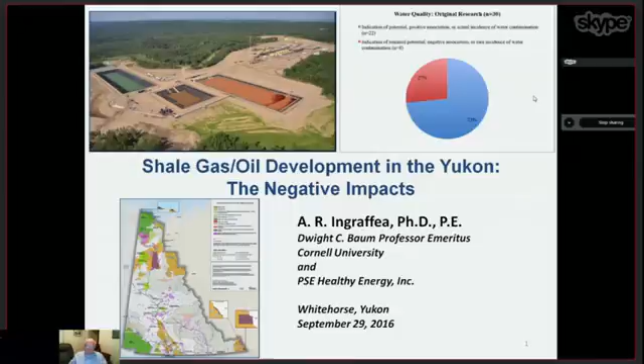So let me begin by telling you what we're going to do, and then we'll do it. So the first thing I'm going to do is answer some of the questions that you have sent to me. With the various communications I've had with the organizers of this session, I received a long list of questions, and it turns out that I had already intended to address some of them, so it's perfectly timely, and it's obvious to me that many of you have done your homework. So I'm going to begin by answering some of those questions up front, but I'll answer all of them during the talk that I'm going to give you.

Then I'm going to go into what is new for oil and gas in the Yukon. There has been oil and gas development in the Yukon in the past. Why is there a concern now? Why is there more concern now? And then I'm going to give significant details on what it takes to get gas and oil out of shale, because that is what's new. How to get gas and oil out of shale. Fracking is one part of it, but it's not everything.

Then I'm going to spend some time talking about what can and does go wrong during this process of getting oil and gas out of shale. I'll concentrate on two specific things in that area. And finally, I want to summarize what the science, the peer-reviewed, highly vetted, prestigious science says about the negative impacts on water, on air, and on human health due to the development of shale gas and oil.

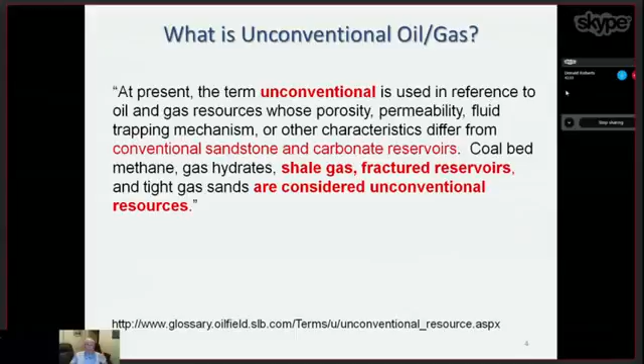So related to this issue of conventional versus unconventional, and this is very confusing, so I'm going to try to unconfuse you, is the issue of fracking. So the question I got was, is it true that hydraulic fracture stimulation, also called well injection, also called fracking, only happens in conventional wells? No. No. Fracking can and does occur in both conventional wells and in unconventional wells.

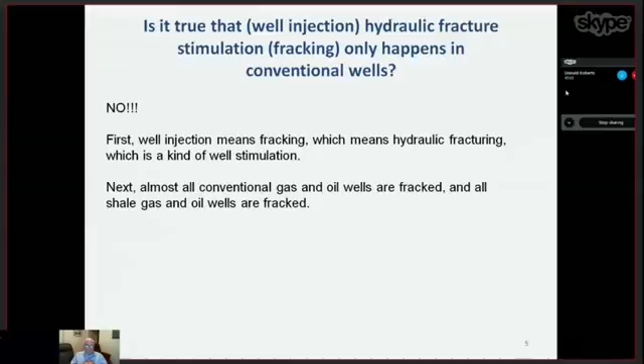The difference is, for you in the Yukon concerned about shale, that it is possible to get oil and gas out of a conventional well without fracking. Even though most conventional wells today are fracked, it is sometimes possible to get oil and gas out of a conventional well without fracking. But it is impossible to get any economically viable volume of oil or gas out of shale without fracking, which is another way of saying all shale gas and oil wells must be fracked. In fact, they must be super fracked. And I'll get to that difference between fracking and super fracking in a few minutes. So again, I hope I've answered that question.

Next question. Could I please explain what a perfing gun is and how it is used? Perfing. Well, first of all, perfing is an abbreviation for perforating, as in take a piece of paper and punch your finger through it, or punch a pencil through it. You're perforating the paper. Except in oil and gas, we're not perforating paper. So the purpose of perforating is to burn holes in what's called the well liner, also called casing. It's steel pipe, as you'll see in a few slides when I actually blow up a well and show you what's inside of it. And a very important part of the structure of an oil or gas well is layers, concentric layers of steel pipe called casing.

Well, you can't get gas or oil to come into steel casing unless you put holes in it. And you can't fracture the rock, you can't put fracking fluid out into the shale without having holes in the casing. So the purpose of a perforating gun is to, quote, shoot, although it really doesn't shoot a solid, it shoots a very, very high temperature liquid into the casing, burns through the casing, and burns a hole into the rock. The whole idea is to give access for fracking fluid to go out of the casing and for oil and gas to flow back in.

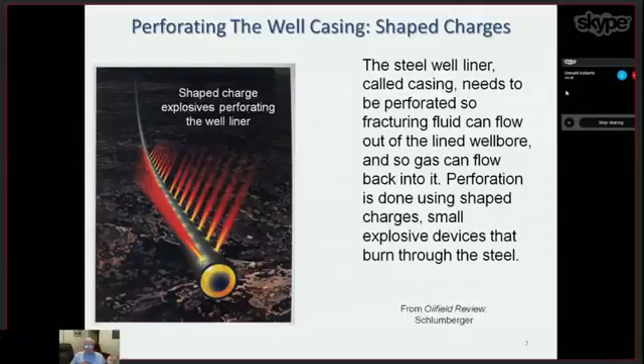So what are these perforating things? The word gun, one thinks about bullets, but there's no bullets here. You're not shooting a solid. They're shooting a very high velocity jet of liquid copper. So I'm not going to go through the details on this slide. You can go to the website, the Oilfield Review by Schlumberger. It will give you all kinds of details.

They're basically shaped charges. Those of you who have been in the military or have followed the military or read military books, shaped charges are used, for example, to penetrate armor in the military. Not with a solid, but with a high velocity, high temperature liquid metal, in this case copper. So that's what perfing is. That's a perfing gun. That's what is necessary during the fracturing process. Thousands of holes need to be burned through the casing in a typical shale gas well. So thousands of these shaped charges have to be created, transported, stored, dropped down into the well, placed exactly so that they get the holes in the right place, in the right orientation.

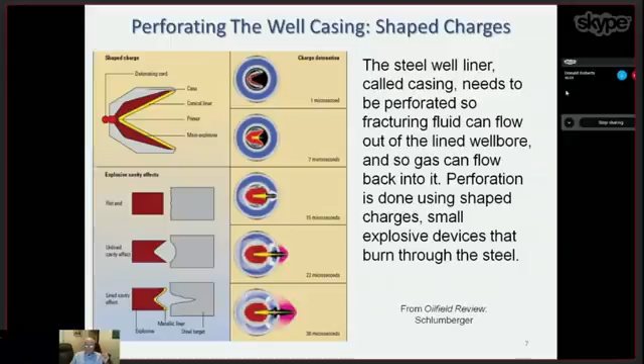We did laboratory testing down in Utah on large blocks of sandstone. So this is a conventional rock. This is a rock that would have absorbed gas or oil from shale. And we purposely did these experiments to try to understand the process of hydraulic fracturing.

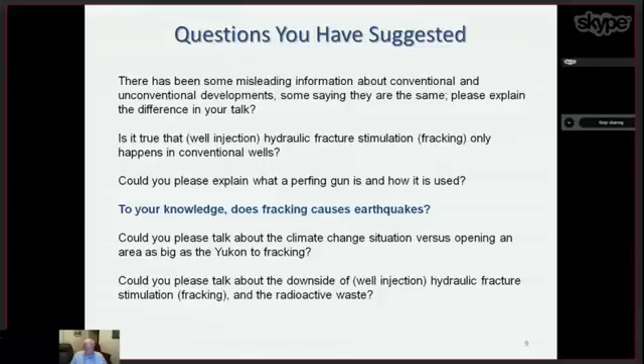Next question I'm going to answer right up front. To my knowledge, does fracking cause earthquakes? Yup, yes, definitely, for sure. In 2 ways: indirectly and directly. By indirectly, I mean that when a well is fracked, and a typical shale gas well in British Columbia is fracked with 40 or 50 million liters of fracking fluid. Much of that fluid comes back up the well after the fracking process, and that's called flowback.

So that's a waste. It's no longer drinking water. It's now wastewater. It's contaminated. So it has to be captured, it has to be stored, it has to be transported, and it has to be put someplace safe forever. In the United States, in most cases, it's re-injected back underground in a waste disposal well. A waste disposal well is typically an old oil or gas well that is no longer producing oil or gas. So it's now capable of receiving large volumes of waste fluid.

The problem is that this process has been overdone. Overdone in places like Oklahoma, Texas, Arkansas, Ohio, and England, among others. And in the process of injecting deep underground large volumes of this waste fluid at high pressure, faults, naturally occurring faults in the earth, have been mobilized.

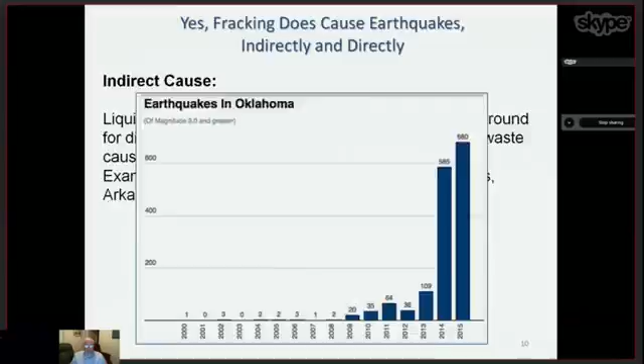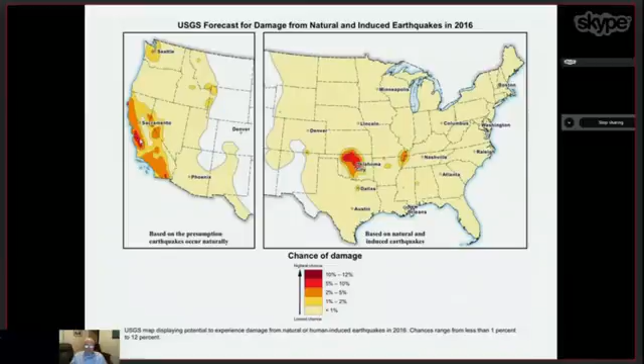So much so that now the United States Geological Survey, which issues maps of earthquake intensity and earthquake risk, now shows that the area in Oklahoma and Kansas and Arkansas and Texas, where there has been a large amount of shale gas and oil fracking and waste disposal, has very high risk of earthquakes. We've now made Oklahoma as risky as San Francisco. Thank you, oil and gas. I'm sure the people of Oklahoma really appreciate what you've done for them.

Second way that earthquakes can happen is directly by fracking. Fracking itself is, by definition, fracturing. Fracturing, by definition, is an earthquake. So, there have been many instances of fracking directly causing earthquakes, most notably not too far south of you in the Horn River area of British Columbia.

So in December of last year, there was a 4.6 magnitude earthquake. At that point, the largest man-made earthquake ever recorded. I said the largest man-made earthquake ever recorded from oil and gas operations. Not quite a year ago. And I then found out that that wasn't the world's largest because in January of this year in Alberta, a 4.8 occurred.

So 4.6s and 4.8s are not going to shake buildings to the ground, but they are going to crack walls. They're going to induce settlement. They're going to knock things off of shelves, and they could injure people. The question now that the earthquake scientists are considering, and this is a very important problem, and they're very worried, what's the upper end? How large an earthquake can be caused either indirectly or directly?

What we've seen over the last 7 or 8 years is that the magnitudes keep increasing. 7 or 8 years ago, the oil and gas industry was absolutely certain that they had never caused an earthquake. Never. In Texas, they still say that they don't cause earthquakes, but that's Texas. They're a different country.

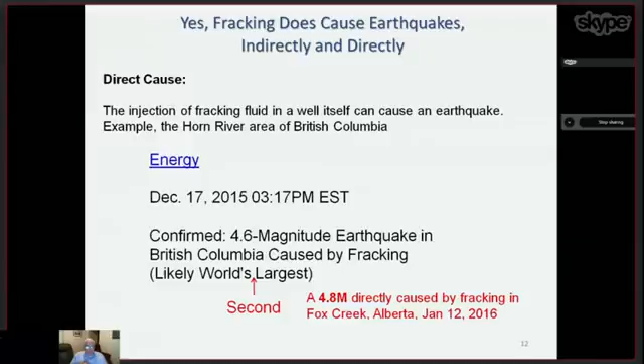But all of the scientists, all the prestigious, real, honest-to-goodness scientists in the earthquake area are absolutely convinced that oil and gas operations now cause earthquakes with increasing frequency and with increasing maximum magnitude. And we are at risk in the U.S., and you are at risk in British Columbia, of having a significant earthquake, a 5.5, a 5.6. Okay, a 5.6 is 10 times stronger than a 4.6. Buildings will collapse.

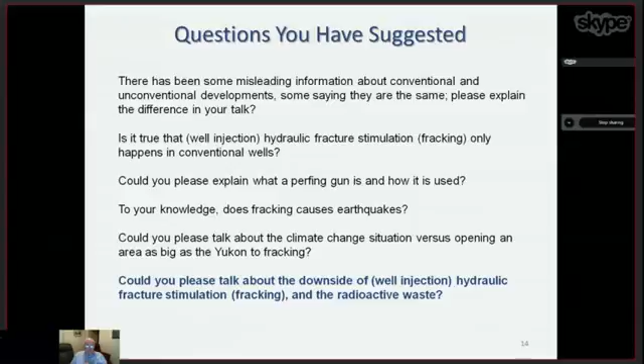There are 2 other questions I'm going to address, but I'm not going to do them right now. They will be addressed later as my talk develops. I'm going to talk about climate change, and I'm going to talk about the downsides of hydraulic fracture stimulation and the downsides of waste from hydraulic fracturing. So I will answer those last 2 questions, and you'll hear the answers later on in my talk. So let's proceed now back to my outline.

The first thing I wanted to do is answer the questions you sent me so we get all the definitions and all the incorrect notions and misinformation out of your minds. Now you have it from, quote, the horse's mouth. Everything I just said is correct and true.

And by the way, I hope that there are oil and gas representatives listening to this presentation somewhere. And if you hear me say something that you think is incorrect, please contact me directly and we will discuss it. I don't want you doing what they do in the U.S., which is you go on your stupid blogs and you criticize my talk without my opportunity to engage with you. Be professional. If you think I'm saying something incorrect, tell me to my face.

So, what is new for oil and gas in Yukon? I already told you. What's new is shale. Now, how do you get oil and gas out of shale? I'm going to use a bunch of pictures and videos and graphs and charts taken directly from the oil and gas industry. You'll see that this chart that I'm showing you right now was created by Chesapeake and Statoil, two major companies, trying to explain to their shareholders the process of getting oil and gas out of shale. So I'm going to spend a minute or two explaining it to you because this is really important. This is unconventional development of oil and gas from shale in one picture.

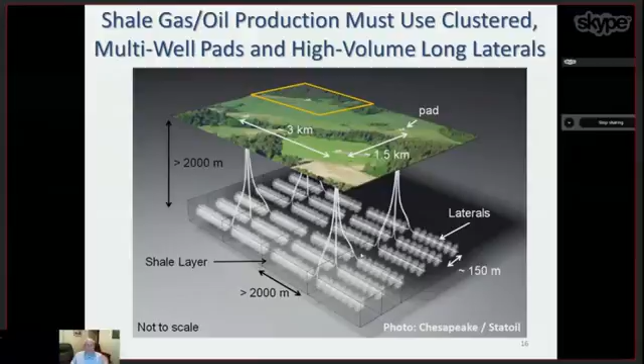So, having done all that, the problem is that this whole process is very inefficient. Industry isn't going to tell you that. You should ask, what percentage of the gas owned by the province, what percentage of the gas in the shale formation are you actually going to produce? Or what percentage of the oil are you going to produce? And they should be honest and tell you, well, we're probably at best going to get 10% of the gas and maybe 3 or 4% of the oil.

So all that effort, tens of millions of dollars on each well, all that fracking, all that heavy equipment, all the infrastructure that we're going to see, all the pipelines, all the compressor stations, all the processing units, all the truck traffic, all the new roads, all the new pipelines, and they're only getting a very small fraction of what's there. Why? Because shale is stingy.

Shale is mean-spirited. Shale is getting even with humans. I'm lecturing here from my pulpit. Shale is getting even with humans because it's angry that it was the last kind of rock that the oil and gas industry went to. It's been lonely for 150 years. It's been waiting for the oil and gas industry to come and take it. And because it waited, it's like the poor guy who was hoping that the most beautiful girl at the dance was going to come and ask him to dance, but she never came over, and now he's really upset.

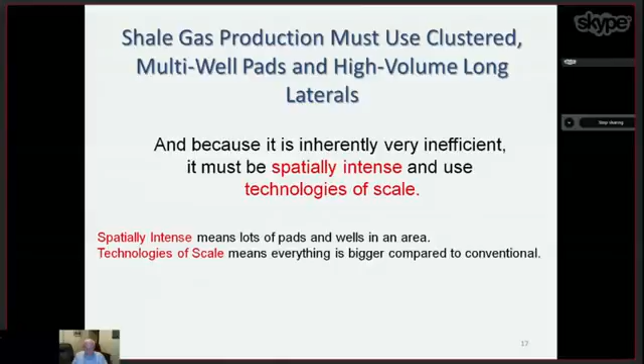So what do I mean by spatially intense? If you were flying over Texas in the area around Dallas and Fort Worth, Dallas and Fort Worth are a few kilometers off to your right in this map. Here's your scale. This is 4 kilometers. Every one of these white dots is a pad. I repeat, every one of these white dots is a pad. And every one of these pads has many wells.

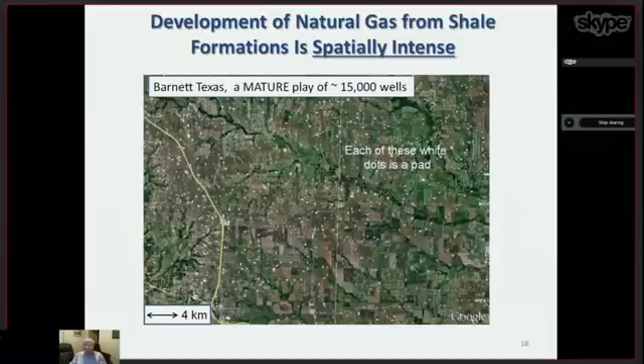So now I'm going to ask you to use your imagination. If there's going to be shale gas or oil development in the Yukon, is it going to look like this? Must it look like this? Is there some other way to do it? It will look like this. There is no other way to do it.

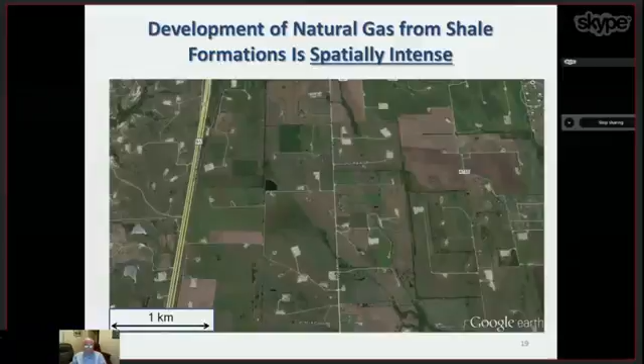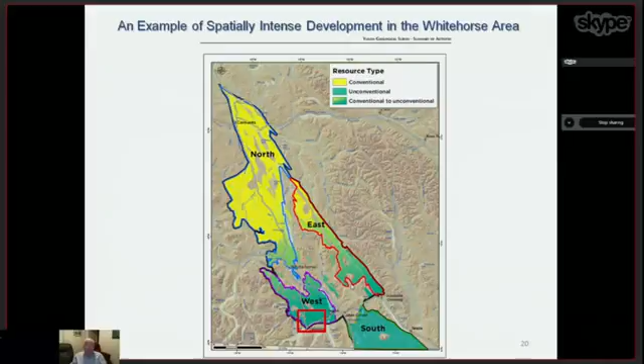So let's transport ourselves into the future. Hopefully a not true future. But let's go to the Yukon. And let's go to some area south of where you're sitting. Here's Whitehorse. We're going to get down here near Carcross. And this is an area that's been designated as an unconventional resource. Here are shales. So let's go into this red box. So this is the area inside that red box. Here's Carcross, Route 2.

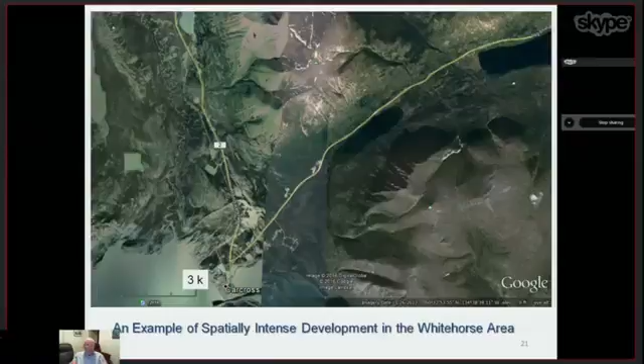Now remember that yellow square I showed you around the pad on that image I showed 3 or 4 minutes ago? Let's start putting pads in this area at the same spacing that the industry would like to use for clustered multi-well pad development. Bingo. Every one of these yellow rectangles is a spacing unit or development unit for a pad. Each one of these red dots is a pad.

And the idea is you don't leave any stone unturned, pardon the pun. You want to drill everywhere. If there's gas or oil everywhere in the shale here, you want to drill everywhere. And so from each of these pads, there would be 4, 6, 8, 10, 12 wells. Depends upon the geology and how much money they have.

Now, as you heard a few minutes ago, the previous speaker mentioned that these wells deplete very quickly. A shale gas or oil well runs out of gas, pardon the pun, in 4 or 5 years. After 4 or 5 years, it's a stripper oil well or a defunct gas well. Turn it off. It's not worth maintaining.

So a company will come in and drill the first 2 or 3 wells from this pad, and then go off and drill 2 or 3 wells from this pad, and then 2 or 3 from here, 2 or 3 from here, and then come back 2 or 3 years later and do 2 more here, 2 more here, 2 more here. In other words, they're going to be around a long time drilling. Years.

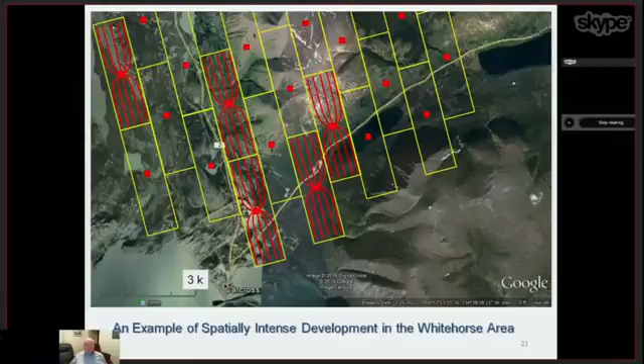Technologies of scale. So I told you everything is bigger compared to conventional. You need the largest drill rigs in existence. They're called triples, with very large horsepower diesel engines driving the drilling motor. You need much larger fracking equipment. You're fracking at pressures that are 3 or 4 times higher than conventional wells.

You're using 100 times more fracking fluid than a conventional well. And you're using 10 times the horsepower for the pumps. Typically 15 to 20,000 horsepower necessary in a frac job. Because you're using so much fracking fluid, you get a much higher volume of waste fluid called flowback. You're going to have larger and longer flaring and venting. And by the way, I have read your regulations for Yukon, and frankly, they are wanting. They do allow flaring and venting.

Venting is direct emission of methane into the atmosphere during flowback. I'll show you a picture of flaring in a few minutes. A lot more truck traffic, because you have to transport large volumes of water, large volumes of fracking fluids, large volumes of sand and a hell of a lot of equipment to each pad multiple times. Not just once, multiple times, because they're not going to do all 8 wells in a pad at the same time.

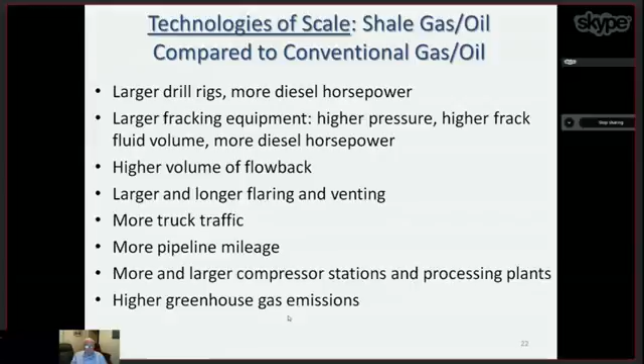And of course, much higher greenhouse gas emissions. And we'll spend time talking about that. So, what does a pad look like? I showed you an artist's rendition. This is the real thing. This is a photograph of one of the largest pads ever. It's in British Columbia, not far from where you're sitting. And in my opinion, British Columbia has always been the experimental playground for shale gas development, because there aren't too many people around.

And you'll notice there's been a tremendous amount of tree removal, a large amount of earth moving. Here's your freshwater pit to store water for the fracking process going down, and here's your wastewater pits to take the flowback coming back up. So all this waste has to go someplace. And you better be asking the people who want to drill in the Yukon, what are they going to do with it? Do you have injection wells in the Yukon? Has anybody checked to see if they're on fault systems? And if you don't have injection wells, where are you going to put all this stuff?

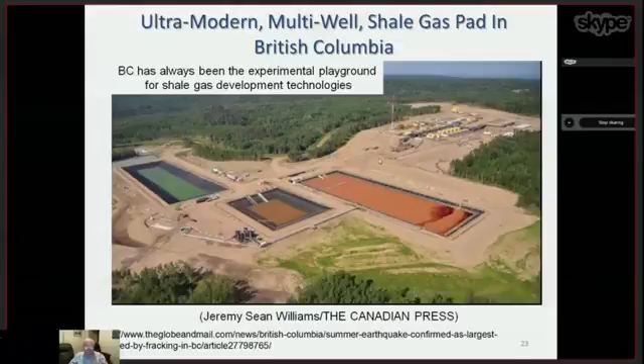So this is probably a 15 or 20 well pad. And when I say that British Columbia has been a testing ground, this is British Columbia, this is Pennsylvania. Look familiar? Large amount of tree removal. And by the way, trees are called carbon capture and sequestration units. Talking about climate change here. This is called burning your candle at both ends. You're killing a large amount of trees, and the trees are there to absorb carbon dioxide, and you're producing a large amount of gas, which produces a large amount of carbon dioxide. Bad news at both ends.

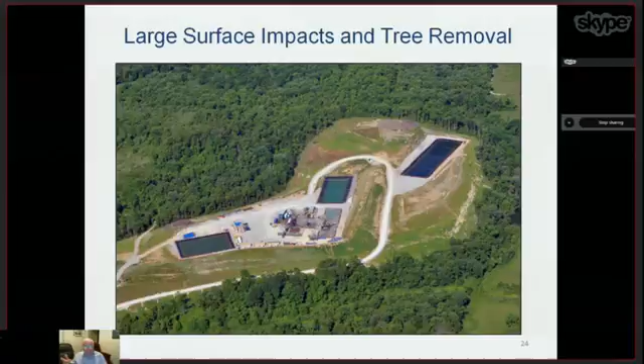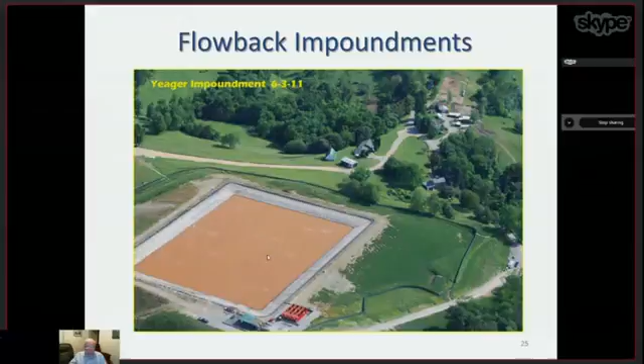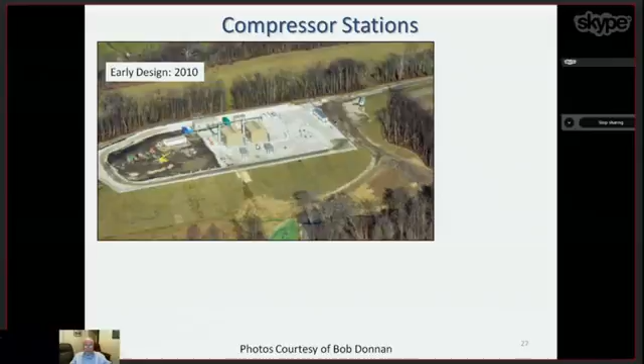Compressor stations. When the gas comes out of the well, it might not be at a high enough pressure to enter a transmission pipeline. So the gas has to be increased in pressure with a compressor station. Inside these buildings are 2,000 horsepower pumps that are pumping up the pressure in the gas. As more and more wells are built, and as more and more pads are built, compressor stations become larger. So here's a more modern version of a compressor station. 1, 2, 3, 4, 5, 6, 12 buildings, each of which contains two 2,000 horsepower pumps.

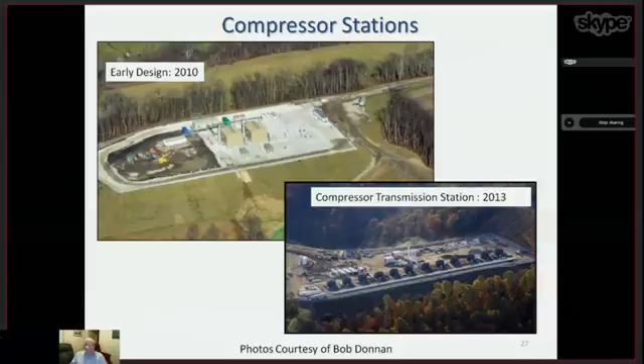They make a lot of noise. They emit a lot of greenhouse gases. And sometimes they have accidents called blowdowns. So I'm going to show you a video. And Jason, if you can cue up the first video at this point. This video is what's called a blowdown event. There's an overpressurization in the compressor station, and an emergency valve kicks off, and a very large volume of methane, natural gas, is emitted into the atmosphere directly.

Let me know when the video has started. We're going to start it right now if it works. Okay.

Is it going? Good. It's been going on for half an hour now.

So this blowdown event in this particular case was in Pennsylvania, not far from where I live now, and it lasted for over an hour. And I hope you can hear that very loud noise it's making. It goes around the countryside. You can hear it from miles away. And literally thousands of cubic meters of methane are vented directly into the atmosphere. This is not uncommon. You have compressor stations built in your area, you should expect to see this happening.

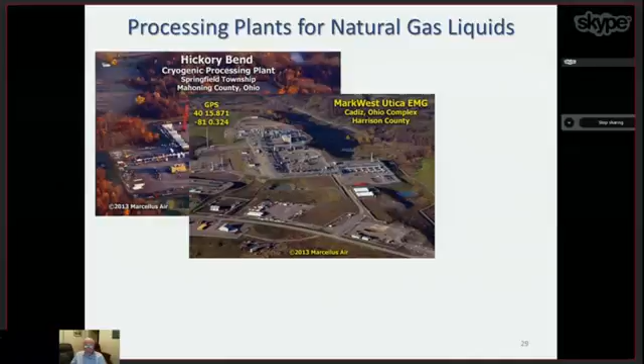So, bottom line, shale gas and oil requires a large number of multi-well clustered pads and what I call significant ancillary infrastructure. By ancillary infrastructure, I mean pipelines, compressor stations, processing units, dehumidification units, storage units. In other words, you take an area like south of Whitehorse and you take bucolic countryside, which is what it looks like from Google Earth, and you turn it into an industrial complex. If that's what you want, vote for it.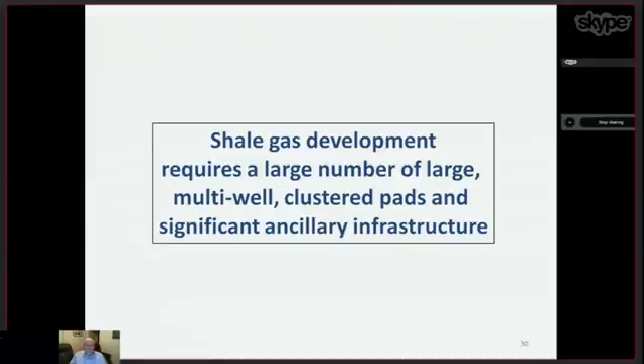Next topic, what can and does go wrong? I'm going to pick two things. Many other things I could talk about might come up during Q&A, but I'm going to pick two things. Drinking water contamination and methane emissions into the atmosphere. So we'll start with drinking water contamination.

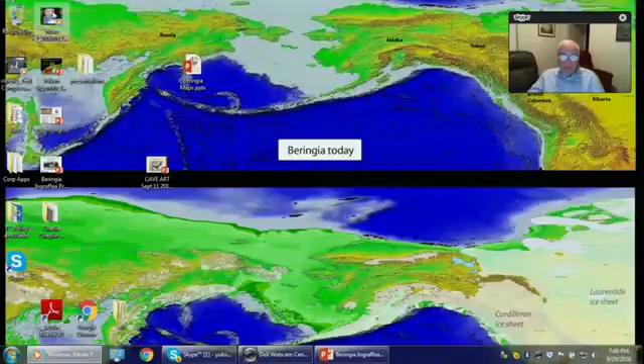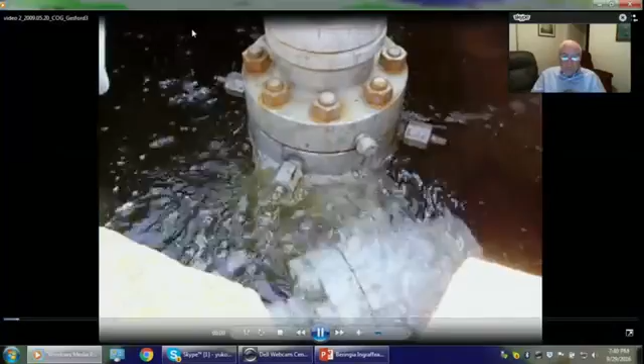Go ahead and do that video. And let me know when it started. Thank you.

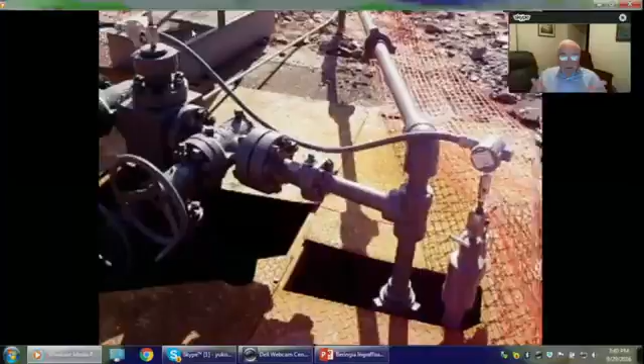So you'll see that there's been water collecting around the wellhead. That's probably snow melt or rainwater. And that bubbling you see is methane gas that's leaking outside the well, coming up into that water, and it looks like it's boiling the water, but it's just gas, like fizz in your fizzy soda drink. And that's methane going into the atmosphere. But it's also going through the groundwater table. So if the gas is leaking outside the well and it's getting to the surface, that means it had to go through the groundwater, which means the methane is now contaminating a drinking water supply. This is bad. And it happens too frequently.

You can stop that video now, Jason. Thank you again.

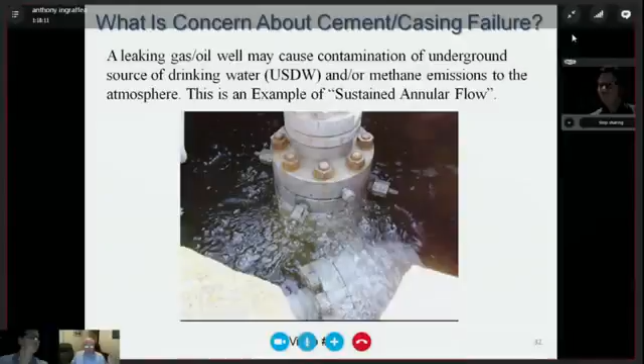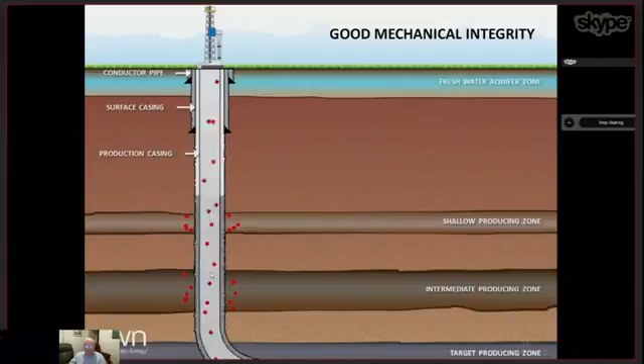And so if your well is correctly constructed, you have cement acting as a gasket so that the gas in this layer of shale can't get into the well. The cement is doing a good job. The gas is only coming out of the producing formation going to the surface. Bad things can happen.

One of the bad things that happens all too frequently is the cement job is bad. And the cement job can be bad for many reasons, and the industry knows it. There are literally 5,000 publications that I'm aware of in the industry compendium talking about bad wells, leaking wells.

So if the cement is not doing its job as a gasket, then gas from these intermediate formations can get outside of the casing that's supposed to be transporting the gas. And if the gas is not allowed to vent into the atmosphere, and it should, by your regulations, the gas is supposed to vent into the atmosphere, but if that vent is somehow blocked off or frozen, pressure builds up, the gas migrates into an underground source of drinking water, and your well water goes bad.

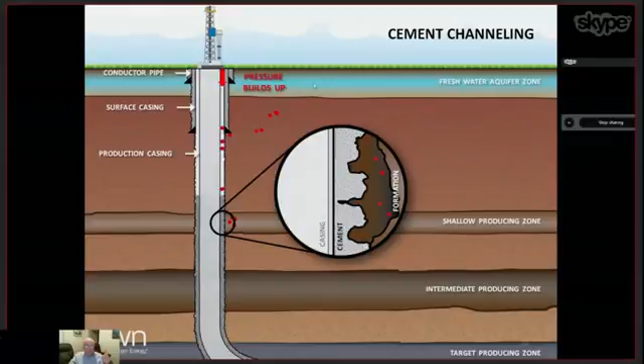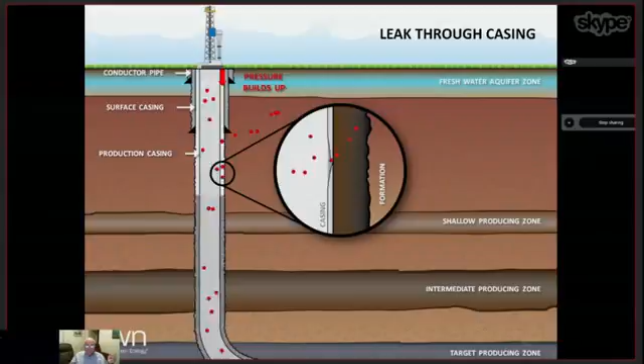You can have a casing failure, corrosion, cracking. Again, casing fails, gas leaks out of the casing, same thing can happen. The gas can get into an underground source of drinking water. Or maybe the cement didn't go where it was supposed to go. It's not like you can go down the well and look.

There are techniques, technologies that can be used to investigate whether a well is well constructed or not. Some regulations require them, other regulations do not. You might not know until the well goes bad that it had a bad cement job. And then it's very expensive and sometimes impossible to fix the well.

How often does this happen? We published a paper a few years ago looking at the frequency of occurrence of leaking wells in Pennsylvania. And what we found is that unconventional wells were failing at a rate of about 6.2%. 1 out of every 16 modern shale gas wells, modern, in a state which has very tough regulations, much tougher than the regulations in the Yukon,

1 out of 16 wells was failing within the first 3 years. And in some places in Pennsylvania, 1 out of 10 was failing in the first 3 years. That's a lot of leaking methane. And we'll talk about what that's done next.

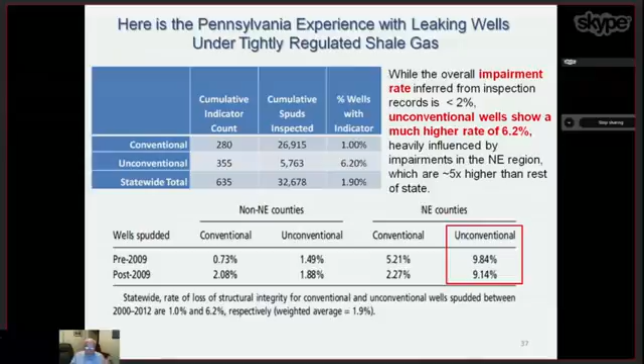And that made shale gas the worst possible fossil fuel from a climate change perspective. And in 2011, we were pilloried. Even the White House criticized us. Said it can't be true, impossible.

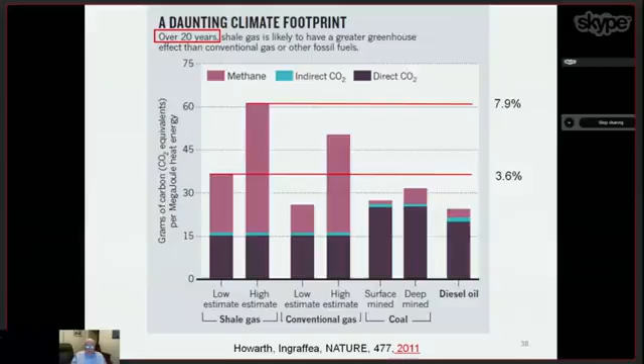Fast forward. 3 years later, our White House publishes 2 major reports. Climate change impacts in the U.S., a whole chapter on methane emissions. And then an entire new plan, a climate action plan, strategy to reduce methane emissions. Oops, we were right.

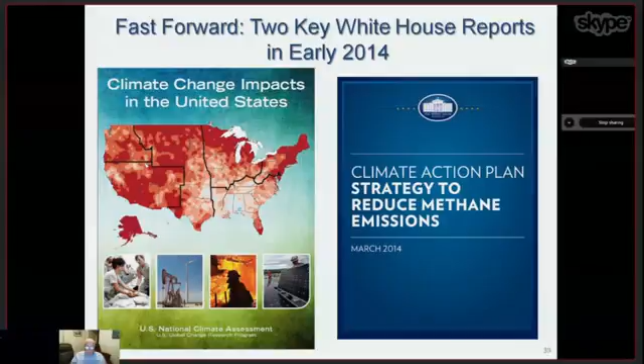Every paper that's been published since 2012, in which people actually went out and measured methane emissions from oil and gas operations in the United States, has shown that that range that we predicted captures what's actually being measured. Okay, well, if this is true, if there is a lot of methane getting into the atmosphere, we should see it when we measure methane concentration in the atmosphere.

And if you didn't know this, you're going to find out tonight. There is only one place on the face of the earth, one place, on an island in the Hawaiian chain out in the middle of the Pacific Ocean, where the United States government, in cooperation with governments all around the world, including the Canadian government, makes official measurements of the concentration of carbon dioxide in the atmosphere and methane in the atmosphere.

And this is a record starting in 1960 of the concentration of carbon dioxide in the atmosphere. And you'll notice that last year we blew by 400 parts per million. We're on our way to 420 within another 2 or 3 years. That's carbon dioxide. Here's methane.

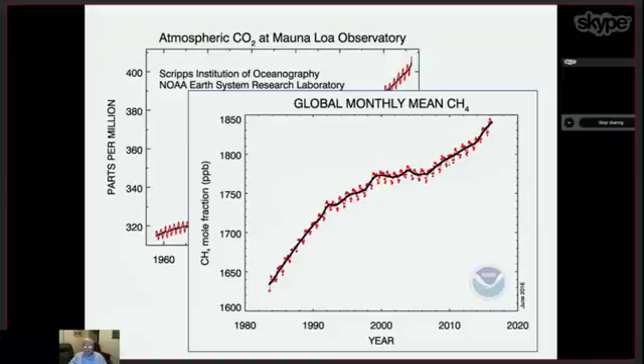This is the concentration of methane in the atmosphere by year. Notice that somewhere around 2002, 2004, here's 2006, methane concentration in the atmosphere had sort of flattened out. But starting in 2006, what happened in 2006? Somebody answer. What started to happen in the U.S. in 2006? Yeah, shale gas development, shale oil development. 50,000 oil and shale gas and shale oil wells drilled in the U.S. since 2006. Is this a coincidence?

The industry says yes. They say this is coming from cow farts or rice paddies. But the most recent paper published just last week has used modern detective methods, modern chemical methods, looking at isotopes of the various components of gases in the atmosphere. And that paper is the first to show very, very positive evidence that this is due to increased methane emissions from oil and gas operations in the United States. My country, this is global. This isn't methane concentration across the U.S. This is methane concentration in the atmosphere of our planet.

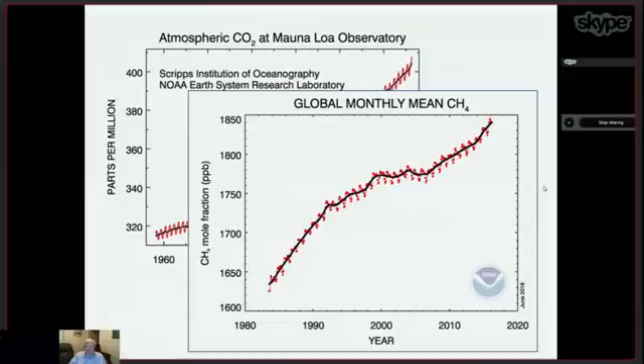So, geez, you know, the White House was really critical of us in 2011, but now here it is 2016, our Environmental Protection Agency is taking steps to cut methane emissions from oil and gas sources. Well, whoopee. Took them 5 years. And I'd be remiss if I didn't show you a picture of your premier and our president at a meeting earlier this year where they agreed that our two countries should curb methane emissions by undertaking regulations that would target oil and gas production. I haven't seen any evidence in your Yukon regulations of oil and gas production. I have not seen any evidence in those regulations that any extra effort is now being taken by regulation to curb methane emissions. Hasn't happened. Should.

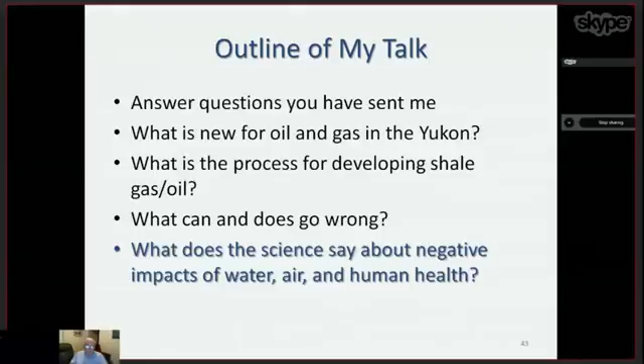Finally, what does the science say about the negative impacts? Remember, the title of this talk is Negative Impacts, Bad Things. Don't take it from me. What does the science say? I'm only one scientist. I can't cover everything. What are the negative impacts on water, air, and human health, among other things? So an organization that I helped found back in 2010 is called PSE Healthy Energy. PSE stands for Physicians, Scientists, and Engineers for Healthy Energy. One of the most important things this organization has ever done, starting about 2 years ago, was to collect all of the known peer-reviewed literature. This is literature that's published in real journals. It's not bloggist shit. It's not somebody's opinion. It's not right-wing talk radio. It's not what you hear at a local bar. This is peer-reviewed literature published by bona fide scientists and engineers around the world.

We've collected what we think is just about every paper that's ever been published in the area of shale and tight gas development. And we put them into a database online. Here it is. And it's very important for you in the Yukon, and you who are the regulators, I hope some of you are listening, the regulators in the Yukon, to understand that you now have one hell of an assignment from this professor. I like giving assignments. I'm a professor. I also like giving exams. So I hereby give an assignment to the regulatory authority of the Yukon that they have to read all 922 papers. But let's look at the history of those 922 papers.

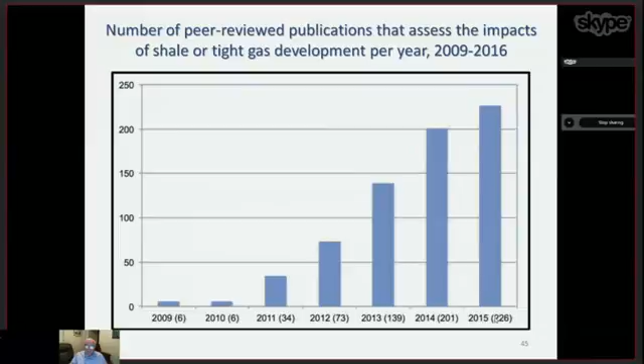Here's a bar graph. In 2009, there were 6 papers. 6. Now, 2009 is 10 years after Texas started developing shale gas. It was 5 years after Pennsylvania and Ohio and West Virginia started developing shale gas. It was 5 years after British Columbia started developing shale gas. And nobody knew anything. There are only 6 papers in the entire literature. 6. The next year there were 6 more. Now there were 12. The next year there were 34 more. Now there are 46. The next year there were 73 more. And the next year 139 more. And the next year 201 more. And the next year after that, 256 more.

So, I can tell you this. Over 50% of all of the knowledge that we have from these investigations reported in these peer-reviewed papers, over 50% of what we know, we've learned since 2014. Anything that happened before that was largely done in ignorance. Any regulations, provincial, territorial, state regulations, had to have been based on ignorance, because nobody knew anything. As of today, there are 922 publications in that database.

To give you an example of the difference between a state that has been very, very careful and a province or a territory that perhaps is not being so careful, in 2008, my home state, New York State, declared a moratorium on fracking. Look, in 2008, there were only 6 papers. And yet New York State was wise enough, careful enough, and protective enough of its citizens to say, we don't know anything, so we shouldn't do it. As opposed to Pennsylvania that said, we don't know anything, let's do it. Ignorance is bliss. If you don't know that something is bad, go ahead and do it. Is that logical?

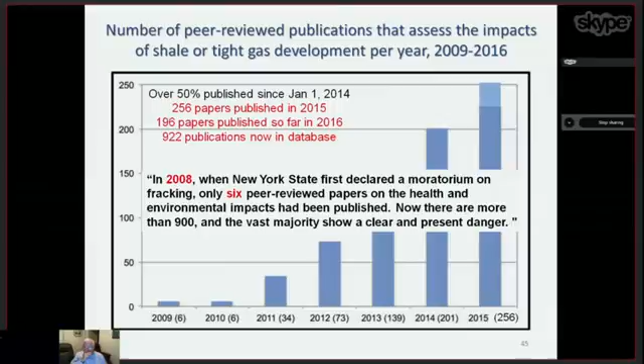So this is what the database looks like. It's divided into 12 different categories. You pick: air quality, climate, community, ecology, economics, health, regulation, seismicity, waste fluids, water quality, water usage. We divided up all those 922 into these 12 categories so it's easier to figure out what you're going to do. Here's Avner Vengosh's paper. You heard from him not too long ago.

But we published a paper this year in which we looked at 3 particular topics: air quality, water quality, and human health. And we read every paper in each of those 3 topics. And then we categorized the paper as to whether the paper said, this is really bad, or we can't tell whether it's bad. And let me tell you what we found.

Human health impacts. We found that 87% of the papers directly addressing human health impacts found bad human health impacts. 13% of the papers didn't find any bad human health aspects. But no paper said people are healthier because of shale gas than they were before shale gas. Nearly 9 out of 10 papers say bad things will happen. Bad things have happened. Bad things will continue to happen.

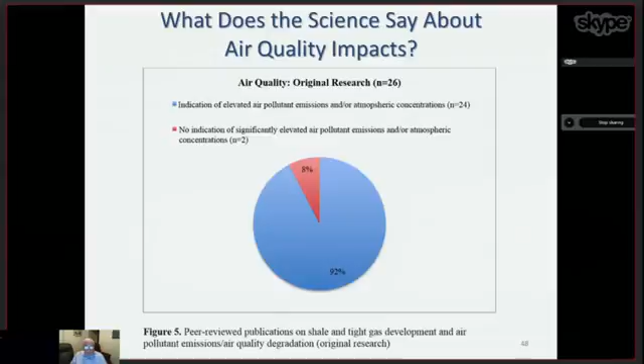Water quality. Nearly 3/4 of the papers have concluded that there has been water contamination due to nearby shale gas or shale oil development. What we're trying to figure out here is consensus. That's the way science works. You get a large number of scientists over a large geographical area, the US, Canada, Europe, and you look at the big picture, all the possible things that can happen. And you study those things over a long period of time, and then you publish.

And you get reviewed, and you get criticized, and you hone in on the truth. And eventually, science always reaches a consensus, a yes or a no. In the meantime, there might be a maybe, there might be a probability, but eventually the probabilities become so significant that something is true that science declares it to be significant. Consensus has been achieved.

I'm not going to sit here tonight and tell you that there is universal consensus yet. This is still only 922 papers. And many of these papers are the result of what are called longitudinal studies. They take years and years. If you're going to study health effects due to radiation or health effects due to ingestion of particulate matter, you can be causing health effects that don't appear for many years in the human. So you have to study a large number of human beings over a long period of time in order to get conclusive evidence that a health effect is actually true.

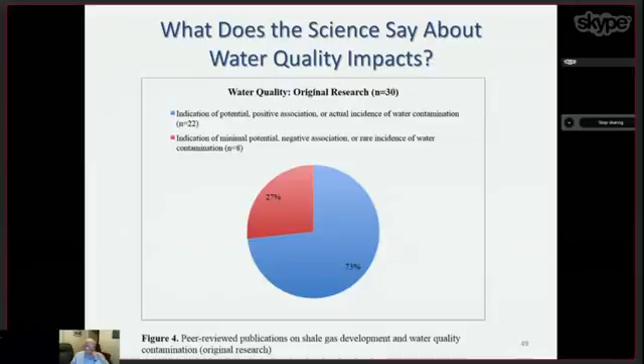So we're still at the beginning, but the problem is we didn't start until 2014. And there had already been 25 or 30,000 shale gas and oil wells in the U.S. So we might have already harmed people. The probability at this point is that we have harmed people before we knew any better. So let me summarize because I'm at exactly 1 hour.

So because of spatial intensity, you know what spatial intensity is now, a hell of a lot of wells, a lot of pads in an area, and economies of scale, shale gas and oil development requires everything to be bigger. Here's what's going to happen. The risks of groundwater contamination are very high. Not because of fracking, but because of loss of wellbore integrity, leaking wells, surface spills, and waste disposal. Those are the key issues for groundwater contamination.

The impacts upon your landscape, I showed you what a pad looks like, and I showed you how close those pads are. It will be considerable and it will be permanent.

The effectiveness of existing legislation and regulation. I have read the Yukon regs. They are poor. The word shale does not appear in your regulations. The word unconventional does not appear in your regulations. Your regulations have not been updated to account for modern development of oil and gas from shale formations.

They're essentially the same regulations that were written for conventional oil or gas many years ago, and they have not been updated. I'm pausing for effect here. Our state of Maryland, which only has a relatively small amount of shale gas and no oil at all, it's just shale gas, only a very small percentage of our state of Maryland has it, just passed their modern regulations. And they are the toughest regulations on the face of the earth. If you want to see what tough regs are, go read the new regs published by the state of Maryland.